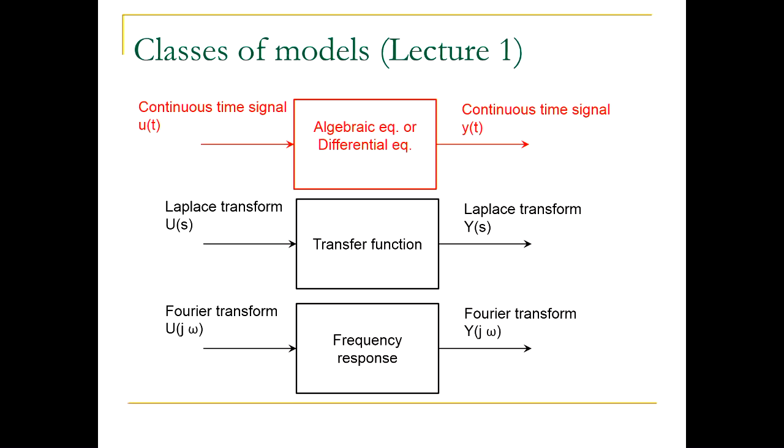All right, so here is the outline. I'll first motivate things. I really want to emphasize the importance of modeling. Modeling is an art. So each model is useful for something, right? Maybe they are useful for design, for analysis, for simulations, for prediction. They are important. From this lecture, I want you to appreciate just how versatile and how useful models are.

So we will talk about the general approach to modeling from first principles, and we will present a number of examples. I probably won't go through all examples. They are there in the slides to help guide you. Please study those examples on your own if we don't manage to cover everything. You can open any book. For instance, Ogata's book or Franklin and Powell book would have several chapters dedicated to modeling of different classes of systems.

Mechanical, thermal, hydraulic, pneumatic, name it. I mean, they have everything there. So you will get samples of a range of different models in these books.

One amazing thing about this subject is that this subject can help you design and analyze any kind of model. Doesn't matter where it comes from, as long as you do a good job in representing your system with your model. You can apply the same tools for mechanical systems, for thermodynamic systems, for fluid flow systems, etc. So generality of this subject really means its widespread use, right? So it can be used in any area of engineering.

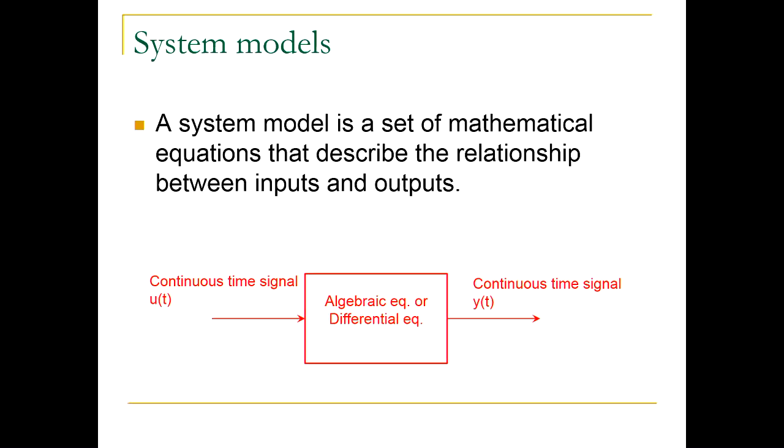How you can think of models, and this is a very abstract view of models, is that a model basically tells you how a set of inputs maps to a set of outputs. For instance, in this seesaw example, if I apply sinusoidal input, which is this movement of this side, then the output changes sinusoidally, right? So sinusoidal input, sinusoidal output. If I apply fixed input, I get fixed output. If I get slowly varying, exponentially decreasing input, I get similar output.

Now, what's interesting is that static systems would have this static relationship between inputs and outputs. So for any given input, there is a single output, right? Whereas dynamical systems, for the same input, may produce different outputs. So what is a dynamical system?

Well, it's myself, right? If I want to get up and exercise, if I'm fit, I will do well, I will do a lot. In the gym, I can lift more weight, I can do more cardio, and I would feel good afterwards. But if I'm not fit, if my initial condition is different, I will feel bad. If I'm sick, I will feel horrible. So when I apply the same input, I try to do the same thing, but the output would change depending on my initial state.

That's a dynamical system. So dynamical systems are systems where some internal memory would affect the output you get for the same inputs. In other words, if you perform an experiment on a dynamical system, you might get different outputs for the same input. And that different output would depend on the initial state in your experiment.

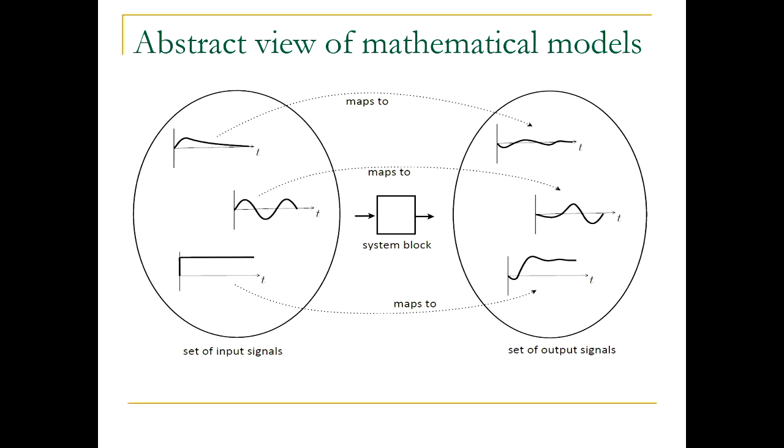So we can roughly classify models into static and dynamic using this test that I was telling you about. So static systems have the same output for a given input. Dynamic systems actually may produce different outputs for the same inputs. And they depend on the so-called state of the system, right? So room temperature control, that's a dynamical system. Why? Why is it a dynamical system?

Why would this room temperature control example be a dynamical system? It depends on the initial room temperature what the output would be. If I turn on a heater at 35 degrees initial temperature in the room, it would heat up very quickly to some higher temperature. If I have an initial temperature of minus 25, it will take, for the same heater input, a long time to warm it up to the temperature I want. So obviously it's a dynamical system, right? Its behavior depends on the internal variable in the system.

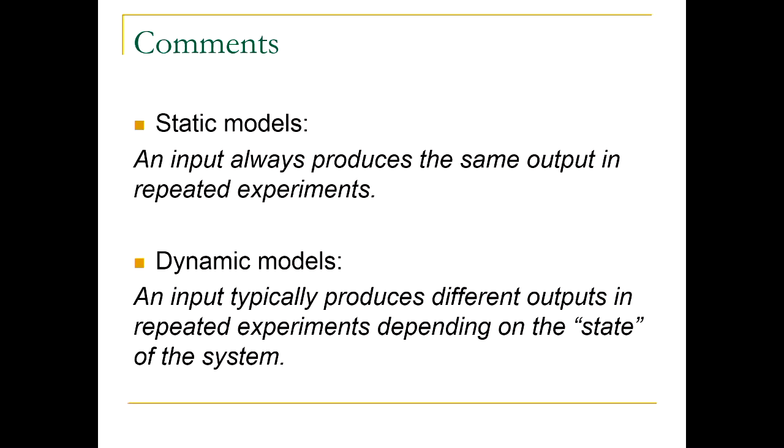So what we want to do is talk about different types of models and present different examples, and also emphasize the importance of models. One purpose of today's lecture is to emphasize the importance of models. I like this quote, and I don't know who really first said this, but it is attributed to George Box. It says: all models are wrong, but some are useful. And it's very, very true.

You cannot expect to have an exact replica of your system in a model. There are too many variables and things that you can't account for when modeling the system. But many of them are useful for different reasons, and we will list some of these reasons in today's lecture.

And you will, in your labs, see how models are useful, because you will have a Lego robot. You will first identify it, fit a model to an experiment, perform an experiment, and come up with the constants in your model. Some things were obtained from first principles, right? And then you would use that model to design controllers, and you will see that they work. That's the beauty of it. So you will see that the models you develop in labs are useful, and we will hopefully convince you throughout the subject that models are very useful.

So why are they useful? They are used for various purposes. One is just understanding input-output relationships, maybe for prediction purposes. For instance, in meteorology, people try to predict climate change. How would temperature change in the next 20 years? They're trying to predict based on some assumptions on carbon dioxide emissions, et cetera. So they are building very massive models to try to predict what would happen 50 years from now.

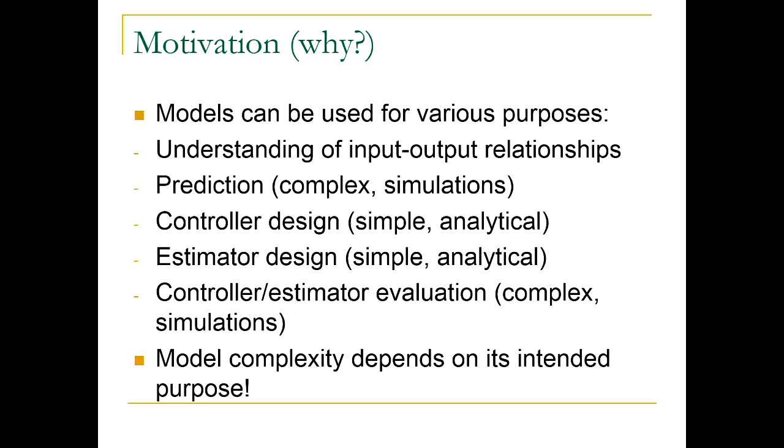All right. So why do we do this also? Other motivation? Well, everything in this subject will be based on models. So without models, you can't do any of the designs or analysis that we will present. It's typically a first step. And this lecture is essential, as I said, because it links physics to mathematics, right?

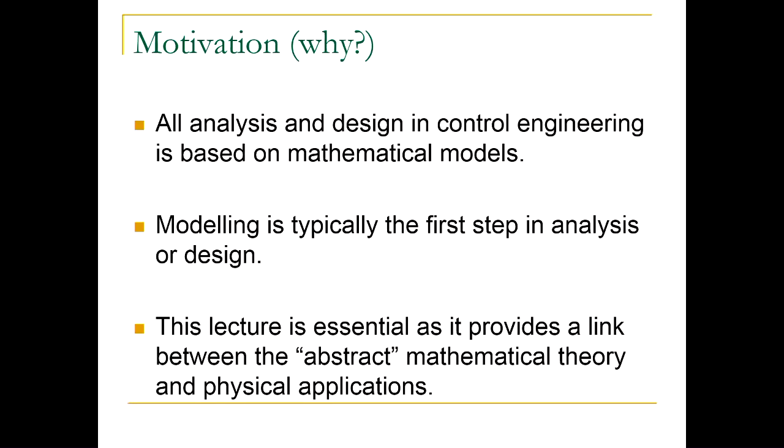All right. How can we do modeling? Well, we can do it from first principles. This is a name we give to approaches that use physics, thermodynamics, any sort of mechanics, physical laws to develop relationships between inputs and outputs. So Newton's laws of mechanics is one example of such first principles. Kirchhoff's laws, Ohm's law, they are all examples of first principles or laws of nature.

So that's the first approach; we can also get models from simplification. One particular type of simplification is called linearization, and we will learn about linearization in this subject and also advanced control. Linearization is basically an approach where you simplify a nonlinear model by a linear model. Linear is simpler than nonlinear, around an operating regime called an equilibrium. So we talked about equilibria, but linearization approximates nonlinearity around a specific operating regime. We will talk about linearization, I think, tomorrow.

Model reduction: you might have very high dimensional dynamics, and some dynamics may be fast, some may be slow. But you may not be interested in fast dynamics that die out quickly, perhaps. You might be interested only in slow dynamics. Then you can talk about reducing the order of the model, and these methods go by the name of model reduction.

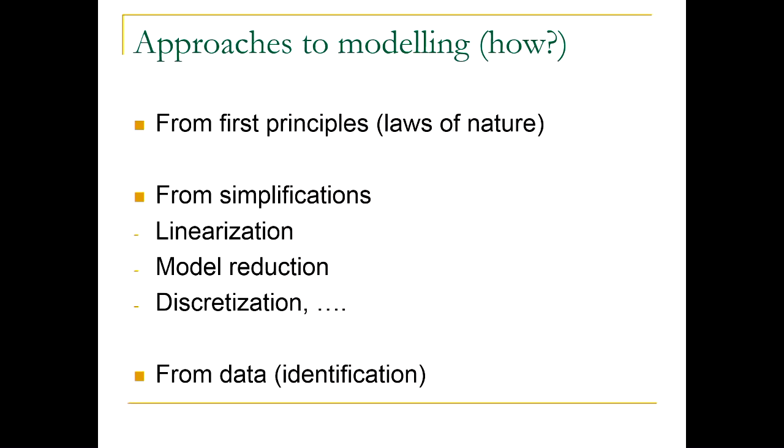From data, you will learn how to perform experiments in your labs and then find parameters in your model. So you use an experiment to basically build a model, right? So there are all sorts of different approaches. And we will concentrate in this lecture only on first principles. But there are all these other approaches, just to give you a better understanding and context. So we want to now concentrate more and more on models from first principles.

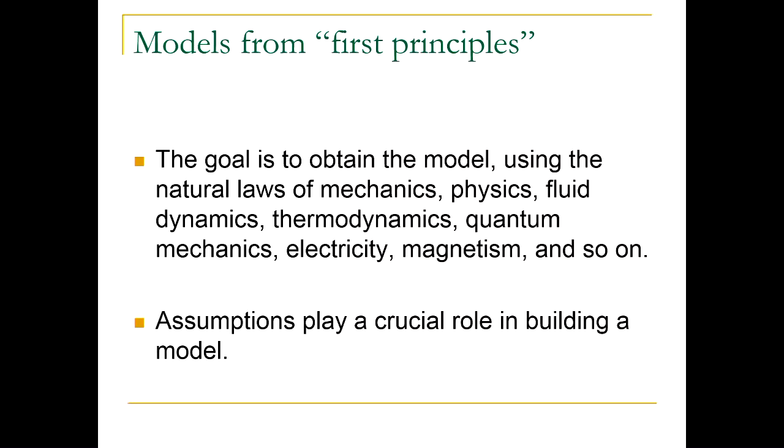This is basically from laws of physics, mechanics, fluid dynamics, etc. And in order to do this, I need to explain an important notion, which is the importance of assumptions. So what are assumptions? Assumptions basically specify operating conditions for your model. For instance, if you want to model me, you may make assumptions. He's not sick, he's fit, he goes to the gym, he had food, he slept well. These assumptions would give you one model of me, right?

If you say, well, he's actually very sick, that would give you a totally different model. Also my age, my fitness, and so on. So these assumptions say, for instance for a car, what sort of operating conditions you are assuming, and your model would only be valid if those assumptions are valid. If you change the assumptions, the model would necessarily need to change, most of the time, right?

So we do not state all assumptions in our examples, but I will present several simple examples where I illustrate the use of assumptions, and then later on I will go quickly over some models, but all of those assumptions still hold. If we do mechanical systems, all the assumptions in Newtonian mechanics would need to hold.

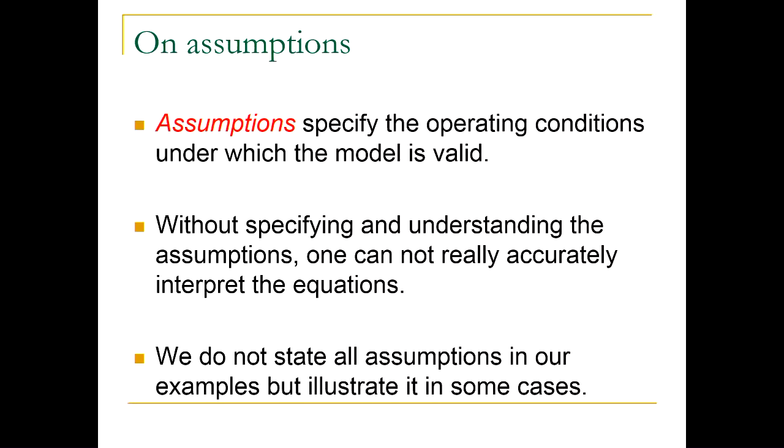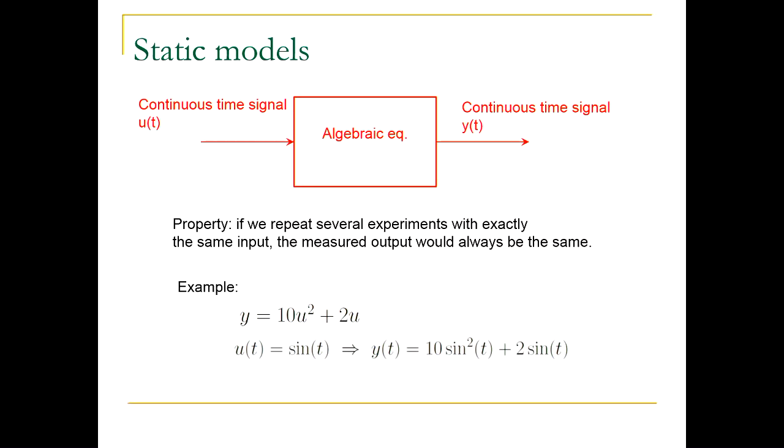Here's Ohm's law. If you have a resistor and you apply a certain voltage to this resistor on both sides, that would cause a certain current to flow through the resistor. The current is I, the voltage is V, and the resistance of the resistor is R. Ohm's law states that voltage is equal to R times I. R is constant. You give me a resistor, maybe 100 ohm or 1,000 ohm, it's a fixed value, right? And then you have this static relationship between voltage and current. The higher the voltage, the higher the current. The constant of proportionality is R. It's very similar to this seesaw example, right? I apply a certain input, I get a certain output all the time on the other side.

Now, you may not have been very careful about the assumptions under which Ohm's law holds. First, the resistor is made of so-called ohmic materials. Not all materials behave like this; semiconductors, for instance, won't. So the assumption is that you made the resistor from an appropriate material. The second assumption is that temperature is constant. You would find that resistance changes drastically as you lower or increase temperature. Another assumption is that current is sufficiently small, so you do not trigger nonlinear effects. If you increase the voltage, you would burn the resistor. A light bulb is like a resistor, and it burns if you apply too high a voltage, right?

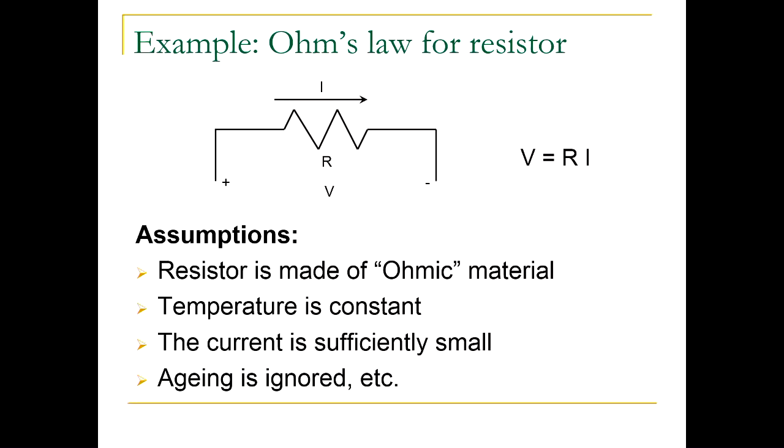So always list all your assumptions clearly. Assumption 1, blah. Assumption 2, blah, etc. Right? Very, very important. Here is another one. So we already mentioned this.

So another static model. We have that force in the spring would be proportional to the deflection of the spring from its sort of zero length or displacement. So force is proportional to ky. K is the constant of proportionality.

Now this only holds if you stay within a certain operating regime. If y becomes too large, you will just break the spring, right? So you just keep extending it and extending it, you will break it, right? This is only valid for small deflections. So then you can use this sort of proportional

static modeling. All right, so are there any questions? Are there any questions so far? No? All right, let's go to dynamic models now.

I want to present a number of examples. We will see how far we go. I will try to go slowly so we understand things. But I encourage you to go through all these examples and go through the Ogata and Franklin and Powell books. They have a lot of examples.

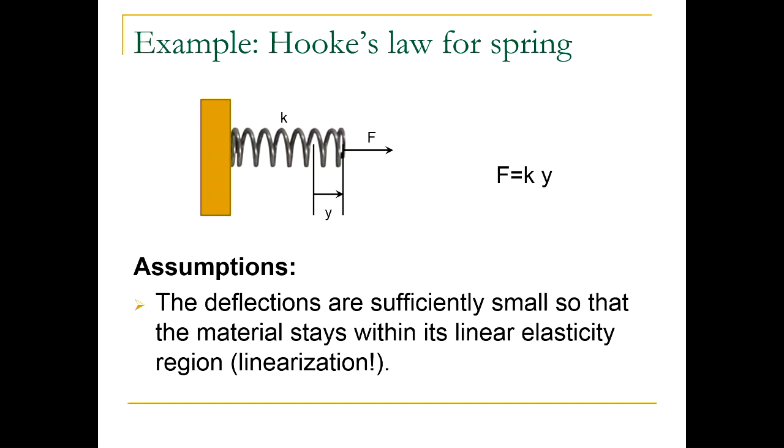The more examples you see, the more comfortable you will feel when you encounter a new example in an exam, right? So you need to be comfortable with using these models, manipulating them. All right, let's look at dynamic models.

Note that y dot equals u is an integrator. Why? Because I apply input, and what is the y? It's an integral of u. Right, so this is an equation of an integrator. Many physical systems would have this sort of model, right? Think about a capacitor or inductor. Depending on how you define your inputs and outputs, you would get this sort of equation.

By the way, for people who forgot about this, y dot represents the derivative with respect to time, so dy dt. So this basically says that dy dt is equal to u, right? We will now go through a number of different examples. We will obtain different dynamical models.

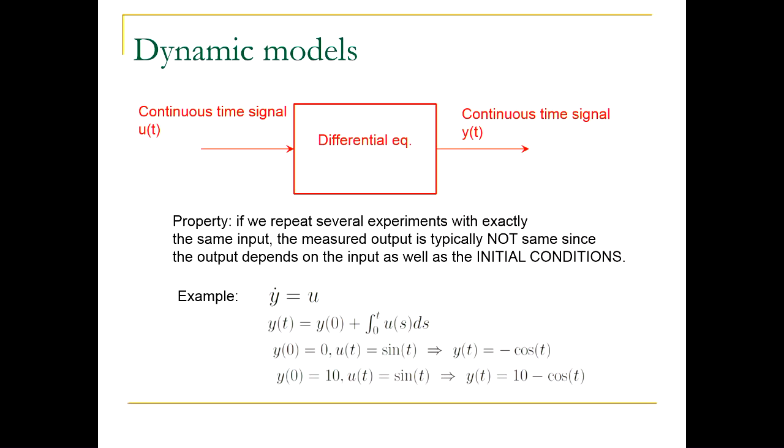Here's one example. What I did here is I just complicated my spring example just a little bit by attaching some mass to the spring. And also, I have now some force U, right? So there's some force U that is applied to the mass. I have mass in kilograms, and I have this spring that is connected.

So note that this model is derived under a set of assumptions. First, Hooke's law for the spring holds, so displacements are small. I didn't stretch the spring to break it, right? Newton's second law holds, so the mass doesn't move at the speed of light, right? So Newtonian mechanics applies. By the way, the speeds at which we move change assumptions.

So relativity theory basically was developed because assumptions of Newtonian mechanics did not apply anymore, and you had to develop a new theory. That's an example of how assumptions are important. So here we assume Newton's second law is applicable. We assume no friction, no damping. So I assume that there is no friction force.

Typically, you will have a friction force. All mechanical systems have some friction. So note that what I'm saying here is that this no friction is an idealization. The model that I would get would not correspond to any real system.

But the friction can be very, very small, and you can reduce it by just lubricating the surface where the mass is touching the ground, like if it's sliding on some surface. So you can get this friction constant to be very small. But here we assume that there's no friction and no damping.

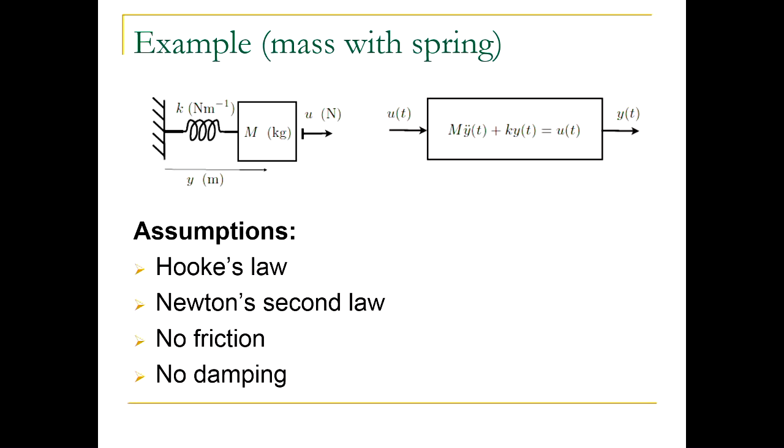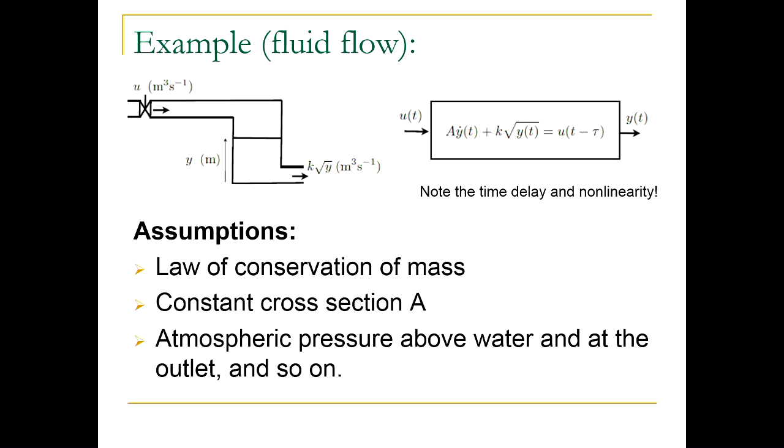So we are getting to the end of the lecture. I want to show you just two more things quickly. So I love this example because this is my teaching tool. And this is exactly the pendulum that is modeled here, right? The assumptions here are that the string is massless. There's no mass in the string. All mass is concentrated in the bob, in this mass here. Arm is rigid and massless. There's no friction, etc.

What you do again is you will need to apply Newton's laws of motion. Here it's done by writing Newton's law of motion in horizontal direction and vertical direction. So you split all forces into horizontal and vertical components. If you do that carefully, you replace all the action of the bob by forces in horizontal and vertical directions. So if you then use Newton's second law of motion in horizontal and vertical direction, you will get something like this under certain assumptions.

By the way, this is no more difficult than just a mass and spring. You just have more forces acting on the system. So if you do some manipulations, you can eliminate force in the arm to obtain this model. Now, note what is interesting here. You have mass, you have the length of the string, right? And then you have this theta, which is the angle that this pendulum makes with the vertical axis.

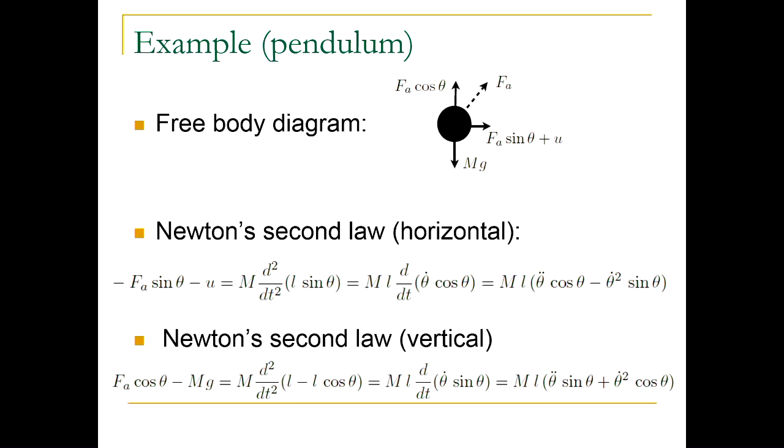Again, you can learn to linearize this model. So theta is basically the angle between the vertical and the true position of the string. So theta equal to 0 corresponds to this position, and theta 180 degrees corresponds to this position. Let's look at the model.

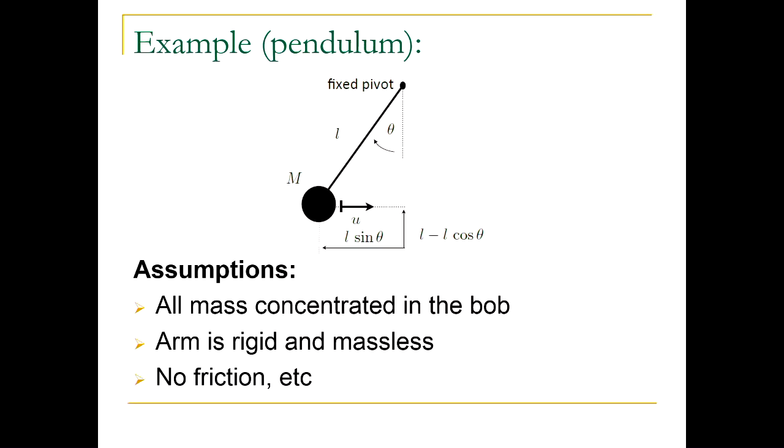What would be, if I have that theta is small, how can I simplify this model? Well, for theta close to 0, cosine is close to 1, and sine is close to theta. If you think about sinusoidal function, if you take tangent at 0, it's basically just a straight line theta. So I can linearize this model around this point for small oscillations. If theta is small, I can replace cosine by 1 and sine of theta by theta.

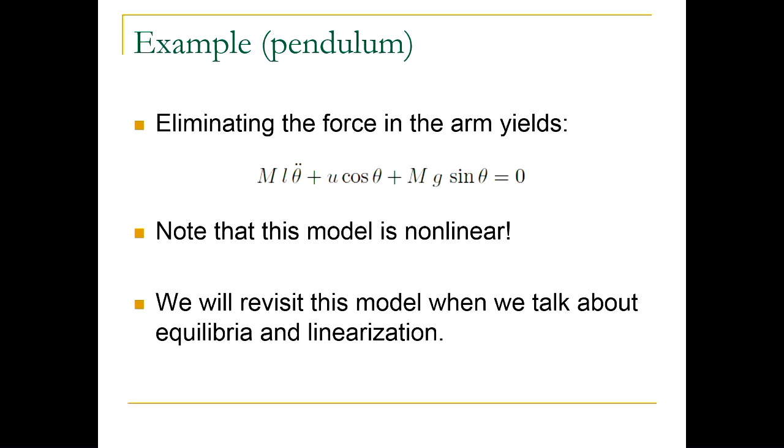All right, there is another example of DC motor. You just work through this. I just want to do one more thing before we wrap up. So this is a classification of all possible models. There are so many different classes of models. So in telecommunications, people like to use stochastic models, because all phenomena are described using probabilities. In mechanical engineering, often you are happy with deterministic models.

You can talk about linear and nonlinear models. We saw several examples of nonlinear models in this class, and we also saw how they can be approximated with different linearized models around different equilibria. They can be static or dynamic. We also saw that. They can be finite dimensional or infinite dimensional. Finite dimensional, think of it as you need a finite amount of data as its initial conditions. So for instance, the RLC circuit is a finite dimensional model. So is the mass with a spring, and so is the example of the pendulum.

The only infinite dimensional model that we consider in this class is the time delay model. Why is this? Because in order to integrate equations, you would need to know the input for all time between 0 and minus tau, because you may have different profiles that would affect the solutions of the system. So you need basically a piece of function, which is an infinite dimensional object. Anything described by partial differential equations is an infinite dimensional object. Navier-Stokes equations, Maxwell-Boltzmann equations, they're all infinite dimensional.

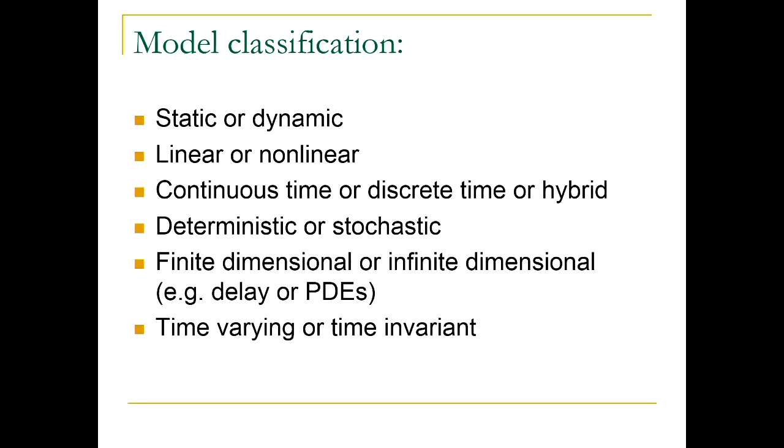Now, when you bear this in mind, look at this. Our focus in this subject is this class of models. We concentrate on deterministic, dynamic, finite dimensional, continuous time, linear, time-invariant models. It's such a small subclass of all possible classes of models. It's the simplest class to consider.

However, you will get convinced through your labs and different exercises you do throughout the semester that this is a very useful class of models, because many systems can be well approximated by this class of models around certain equilibria. So although it's a very simple, very special class of models, it's extremely useful. And we will concentrate only on this. So if I drew sets of models, this may be stochastic, nonlinear, infinite dimensional, time varying. But we use just a small subset of this class. And still it will prove to be extremely useful for everything that we do.

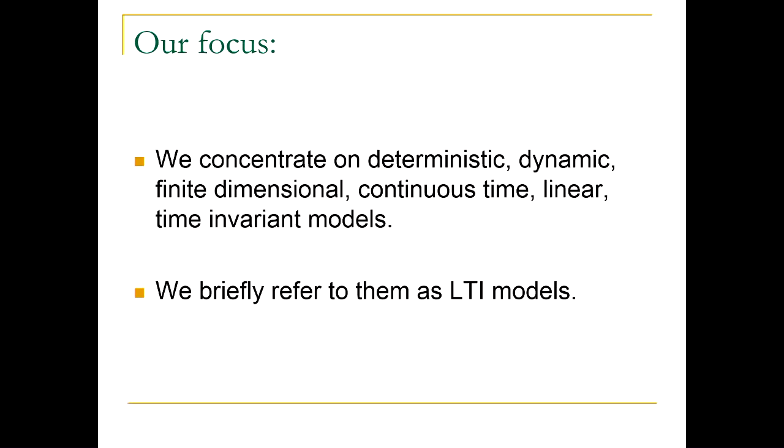All right. So what we talked about today is models. What's a model? It's a mathematical description of the system. We saw that models can be obtained from first principles, and assumptions specify the operating regime for which the model is valid. Control-oriented models need to be as simple as possible, but no simpler than this. So you can approximate a circle by a square, but that's not a good approximation.

We have also shown several examples of models, and if you open books by Ogata or Franklin Powell, you would have a whole catalog of different models. I encourage you to study these, because it will make it much easier for you to handle these things in the context of this subject. Questions?